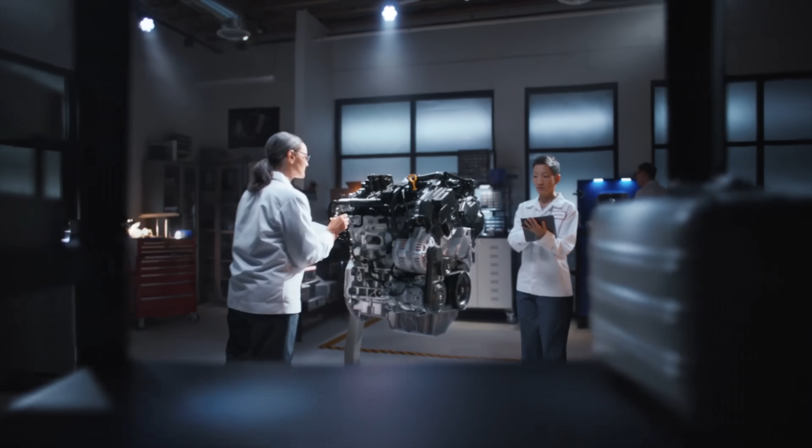It's codenamed J35Y8. And it's the new V6 for the 2023 Honda Pilot. Except that this time, Honda's dropped its iconic variable valve timing VTEC and added an additional camshaft for each bank. I'm talking about the first naturally aspirated dual overhead cam V6 in any Honda or Acura since the first generation NSX. Today we're looking at the new V6 engine, why Honda dropped VTEC, and how this engine will be significantly cheaper.

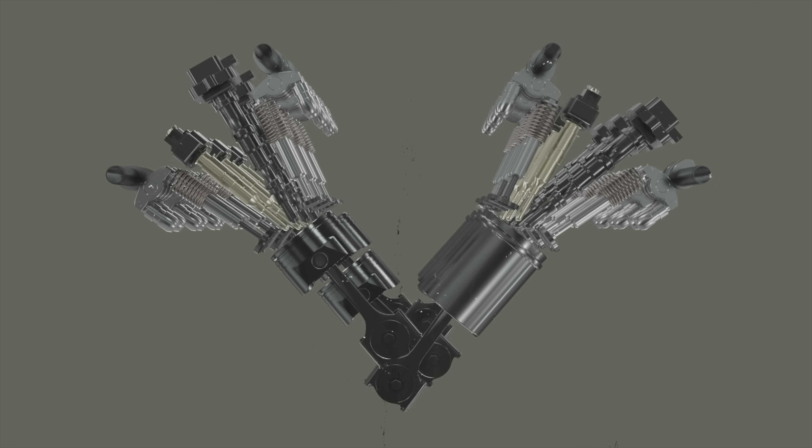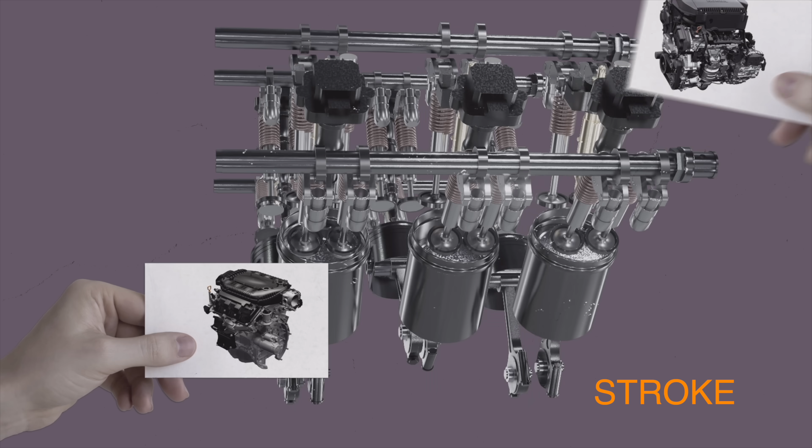Let's just dive right in. So the new V6 has the same bore, stroke, and compression ratio as the previous engine. In other words, the diameter of the cylinder is the same. Also, the phase of the engine cycle when the piston travels from top to bottom or vice versa is the same. And the ratio of the volume of the cylinder combustion chamber with its piston at the bottom position and top position is also the same.

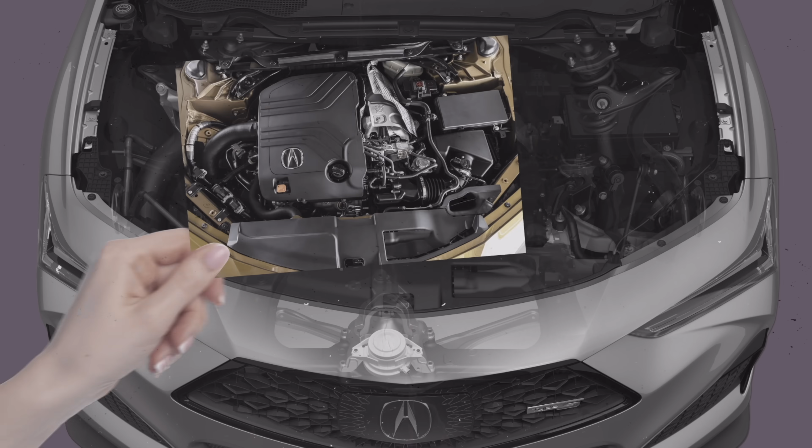But now, here's what's interesting. It's not what this new engine has, but what the engine has left behind. Instead of Honda's iconic VTEC system, it has an additional set of camshafts by way of the TLX Type S's double overhead cam heads. To appreciate the change, you have to understand what VTEC is in the first place. Most car enthusiasts have heard of VTEC, but to be honest, not many understand or appreciate how it works.

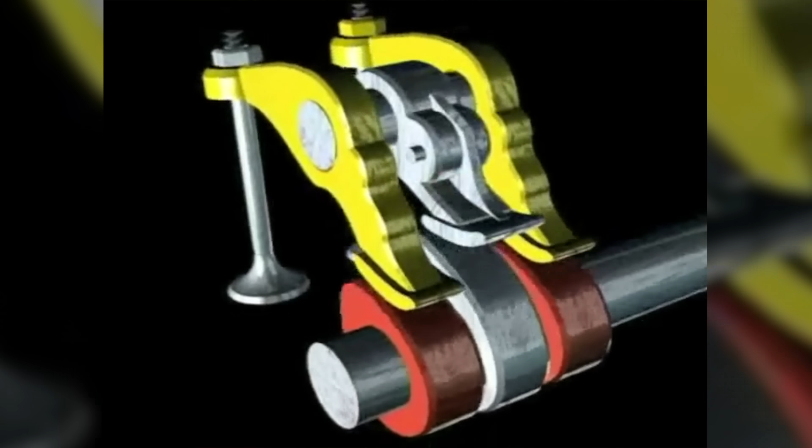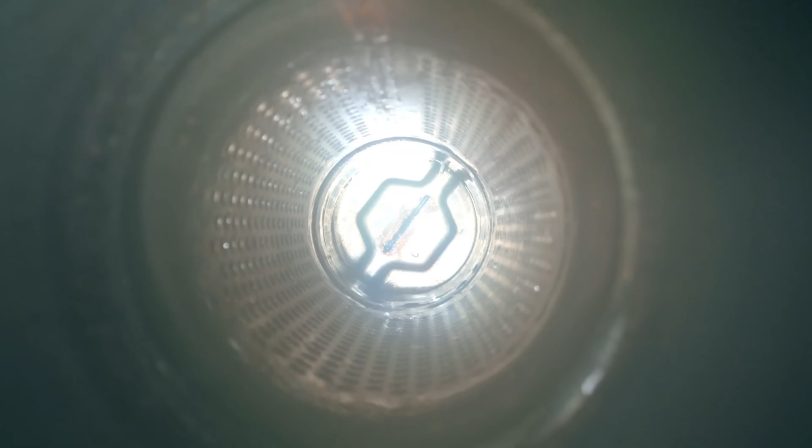VTEC is a type of variable valve timing system that Honda specifically developed. It's been used in Honda and Acura models since 1989, including the Acura NSX and Integra Type R, as well as the Honda S2000 and the Civic Type R. VTEC helps improve the efficiency of the engine and enables the engine to perform a lot better at higher RPMs. And the VTEC system also gets you low fuel consumption at lower RPM.

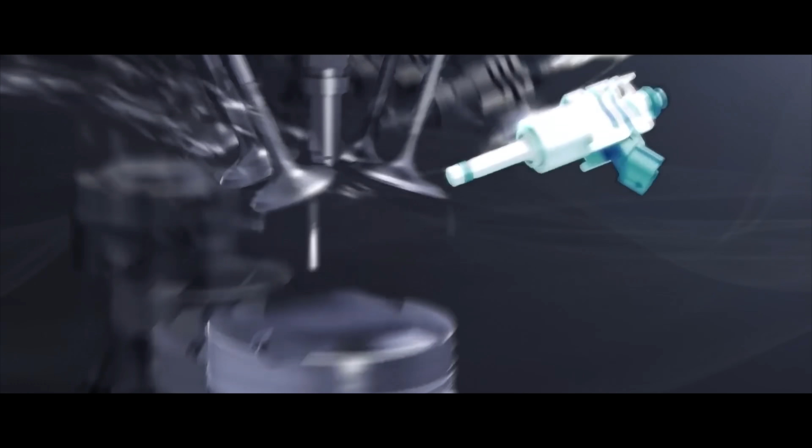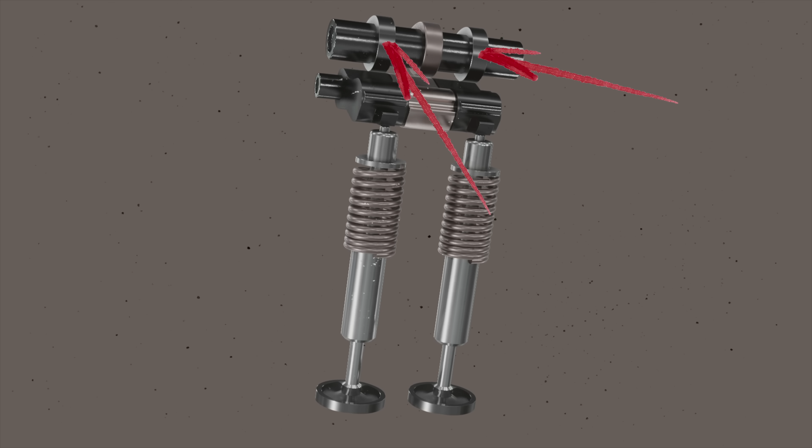But here's the thing, the Honda VTEC system is distinct and is nowhere near the average variable valve timing system you find in other cars. Most other systems increase the oil pressure to shift the timing of the camshaft and open the valves earlier. But the Honda VTEC engine has two different cam profiles on a single camshaft. First, we have two rocker arms with their own low-profile cams for each cylinder. The engine operates these when you're at low RPM and low load, and the rocker arms are unlocked.

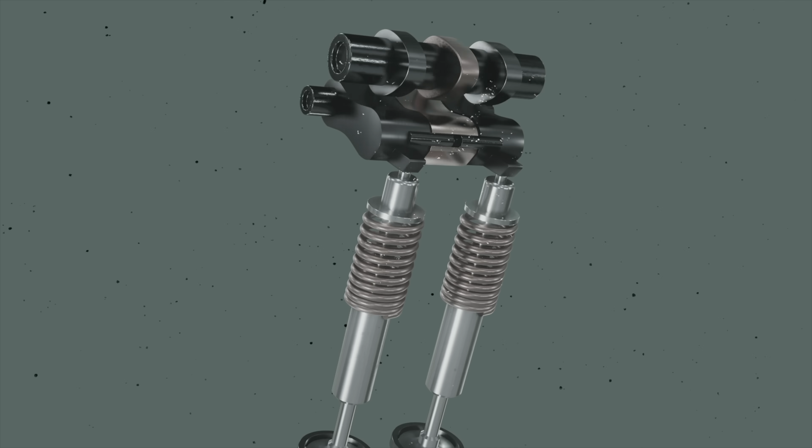And then there's also a central rocker arm with its own high-profile cam. It's unused at low RPMs. But at higher RPMs, the engine operates with a larger cam profile. As engine speed rises, the piston inside the rockers gets pressurized with oil, and that locks all three cams together to increase valve lift. In other words, the opening gets bigger and therefore enables more air to get into the engine. And actually, that's why you hear the iconic sound of the VTEC kicking in. It's that raw, loud, high-revving signature sound that gets your adrenaline running.

Funny enough, Honda first came up with the VTEC concept in the 1980s. It used it first for its CBR 400 motorcycle back in 1983. At that time, the concept was called Revolution Modulated Valve Control, or REV for short. It wouldn't be another 6 years until Honda would first add VTEC to one of its cars, the 1989 Honda Integra XSI, thereby creating an uproar in the car industry.

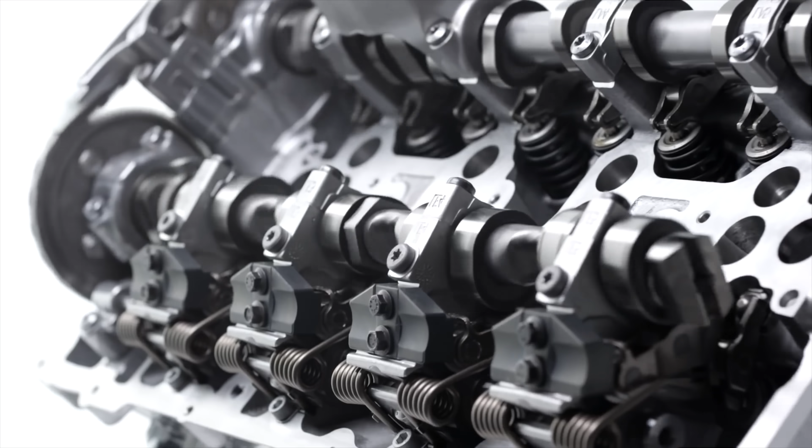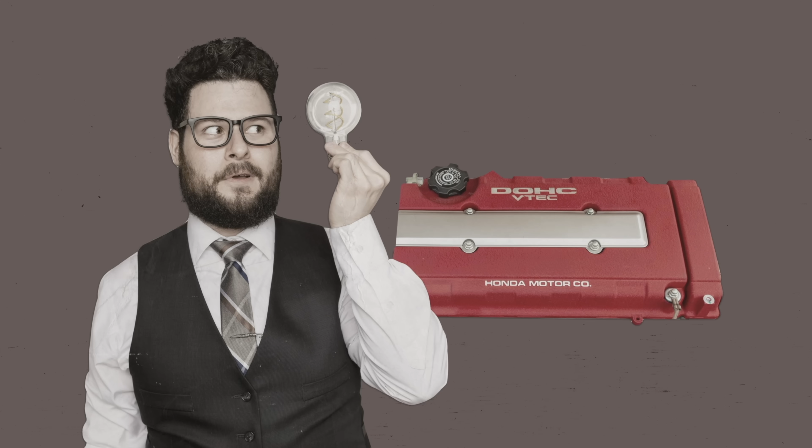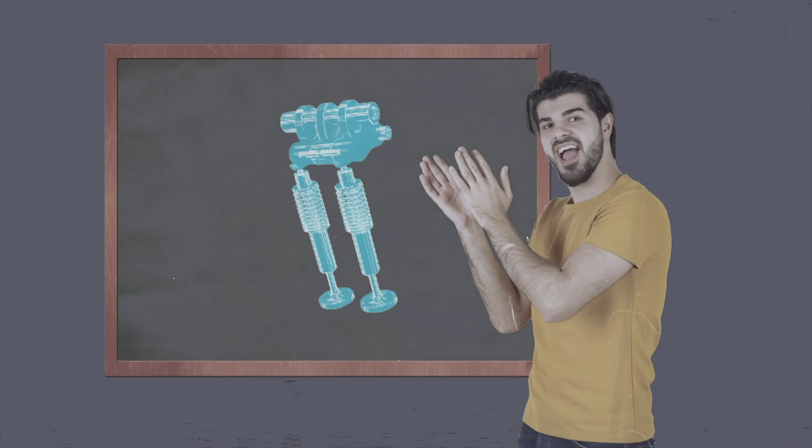Other car makers use variable valve timing, but they use different mechanisms and technologies. For example, BMW has Valvetronic. Toyota's technology is called VVTL-i. Honda wasn't the first to use variable valve timing, but it was a pioneer with its VTEC technology because it was the first car maker to combine lockable rocker arms and dual profile cams. It enabled Honda to combine two engine characteristics into one single engine and change it while it was still running. The concept and mechanism itself is so simple in hindsight, yet the output and result was remarkable.

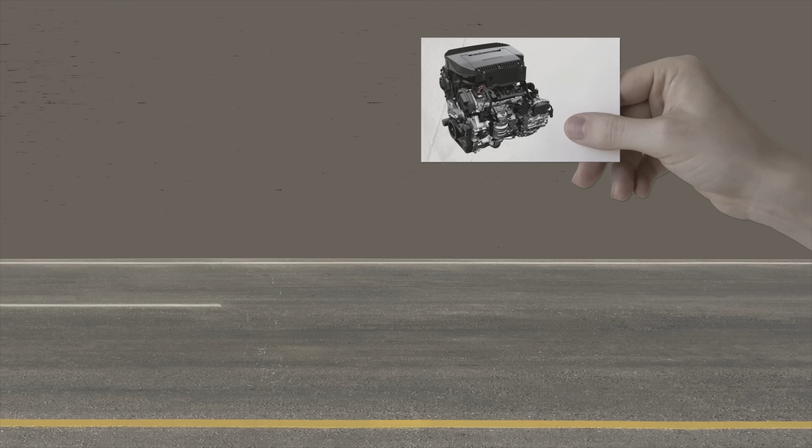Anyway, here's the thing about the Honda's new V6. It doesn't have Honda's signature VTEC system at all, and it comes as a surprise, since VTEC has been so iconic to Honda. It begs the most obvious question, if VTEC's so great, why is Honda ditching it on this engine? The new J35Y8 V6 engine boosts the horsepower up to 285 horses in total in the new Honda Pilot. That's just a nominal gain of 5 horsepower. And the car retains its current 262 pound-feet of torque.

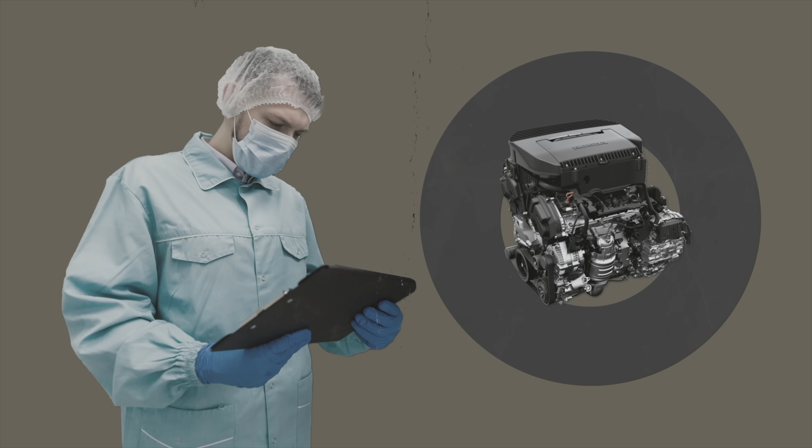But where the new engine really shines is when it comes to emissions. And that's why Honda ditched its VTEC. So you can blame it on emissions and regulations. It turns out the new engine is significantly cleaner than preceding ones. We're talking some 40 to 50% reduction in emissions with this new engine.

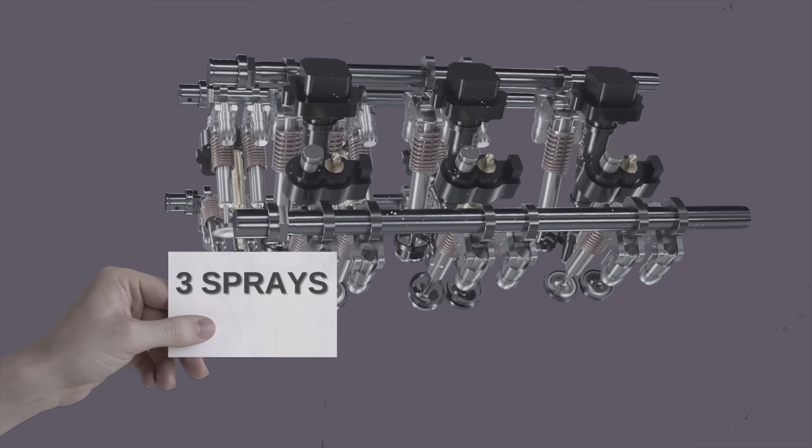Part of this efficiency improvement comes down to the engine's improved direct injection system. This improved system means more precise fuel delivery. On top of that, the system can also add up to 3 sprays per combustion cycle. And in the process, it uses smaller injector holes. And because there's no VTEC, the cam phasers can now continuously and precisely adjust intake and exhaust timing.

But, well, let's just say that there hasn't been too much excitement around the new engine. Actually, some Honda fans are pretty disappointed since it doesn't have the same performance gains that Honda owners were hoping for. But here's the thing. Its intent is to help Honda bridge the gap until it either electrifies its current lineup or develops new EVs. Honda's another late bloomer in the EV game. It's trying to catch up with this newer, cleaner V6 as a stopgap measure.

In the car world, Honda's been neck and neck with Toyota. These two Japanese car giants have been making waves for years. If you ask me, I think competition in the car industry is a good thing. It's what moves the car makers to constantly up their game, take risks, and innovate.

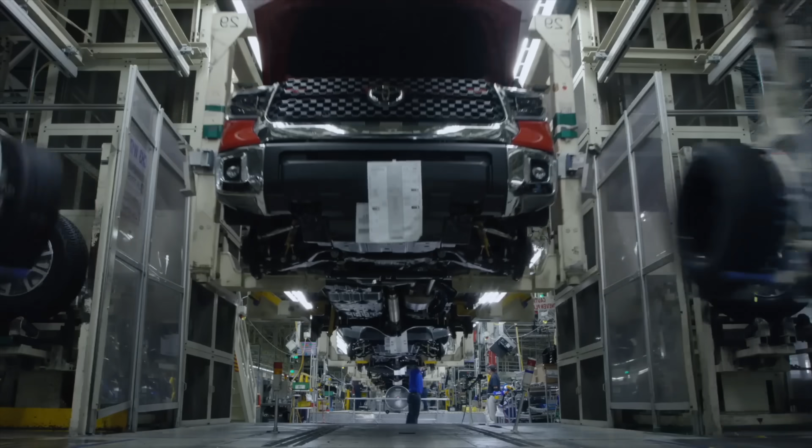And that's good for the end consumer, us. Honda and Toyota's rivalry has been described as one of the hottest rivalries in the industry. Each offers its own unique cars, some of which have become very iconic, with a cult-like following. Each company has influenced the entire car industry for decades.

But of course, the two companies aren't exactly alike. They may share similar interests, but there are key differences between the two. For example, if you look at Honda, you'll see that Honda puts its focus on speed and handling, in contrast to Toyota, which prioritizes dependability and reliability instead. Despite different strategies, each has put out some of the most legendary car engines to date.

Toyota doesn't have one specific famous engine. Rather, Toyota is generally known for everything from its tiny 3-cylinders to a V10 and even iconic inline 6s. Honda, on the other hand, is quintessentially famous for VTEC engines. VTEC's been around for 30 plus years. In fact, there are 5 particular VTEC engines that are notable in my book as the top Honda engines of all time. You could say these engines were VTEC milestones in their own right.

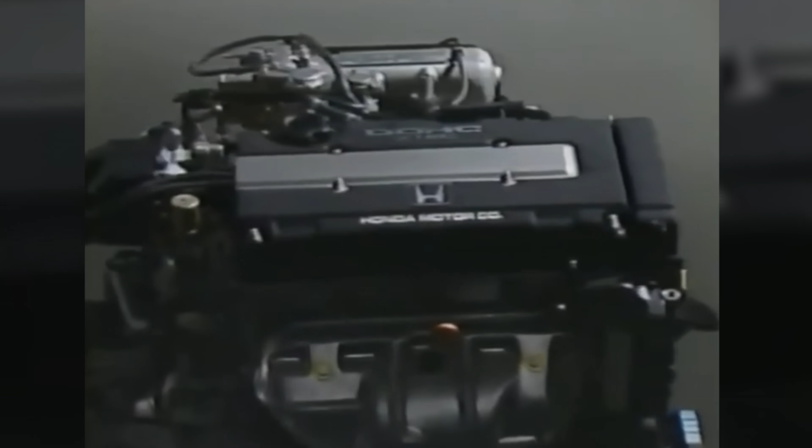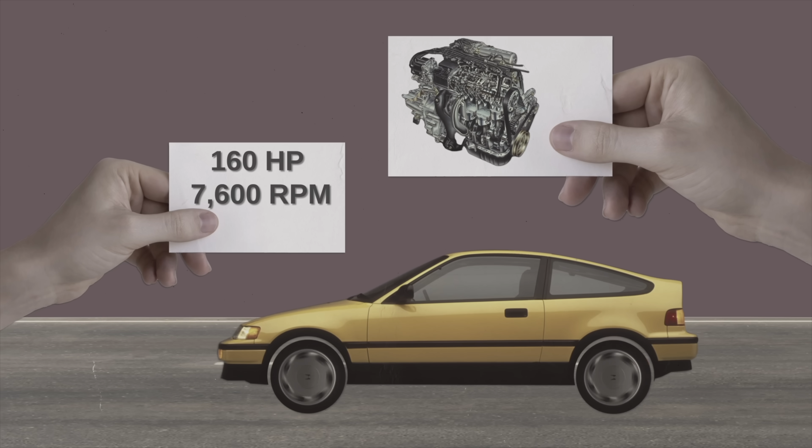It first started with the 1989 Honda Integra XSi. That was the first Honda to ever use the VTEC system, and it came with a B16 engine, which some Honda fans still call one of the greatest engines of all time. The first generation B16A engine was a 1.6-liter 4-cylinder double overhead cam VTEC engine. It output 160 horsepower at 7,600 RPM and 110 pound-feet of torque at 7,000 RPM.

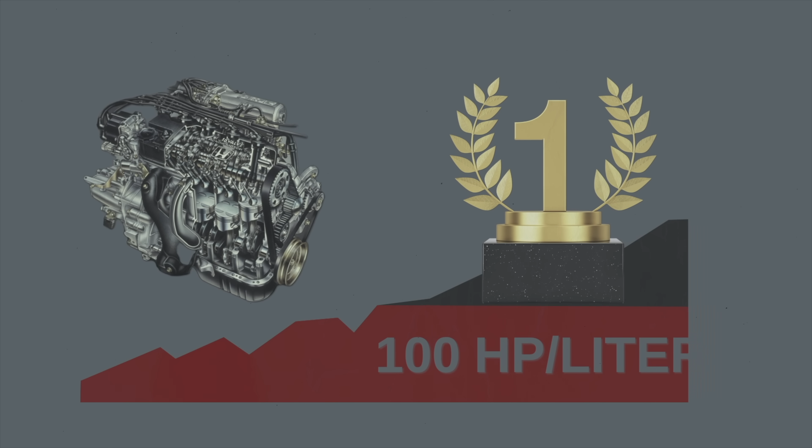It was also a milestone because it was the first ever mainstream naturally aspirated engine to hit the 100 horsepower per liter mark. I say mainstream because, if you want to get technical, the first production car to hit that mark was the Ferrari 250 GTO. But let's be real, Ferrari's not really mainstream.

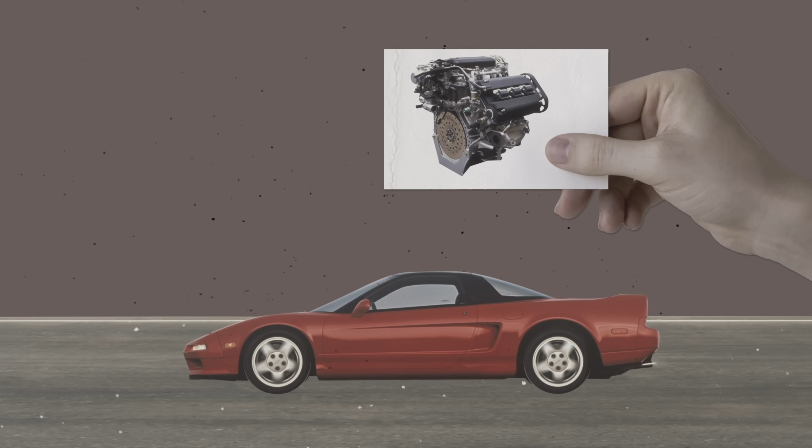A year later, we saw the C30A, and we saw it in the NSX, which is Honda's first attempt at a super sports car. That's when Honda started getting into Formula One. The first generation C30A was a 3-liter double overhead cam VTEC naturally aspirated V6 engine, and this engine churned out 270 horsepower at 7,300 RPM, 209 pound-feet of torque at 6,500 RPM.

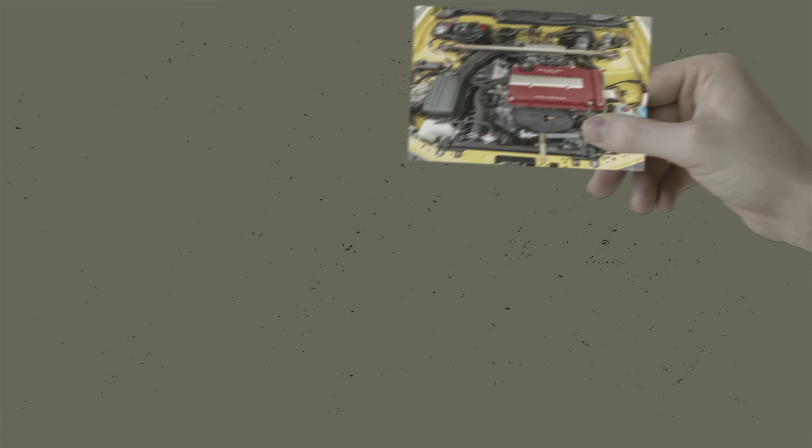Half a decade later, we then had the B18C in the 1995 Honda Integra Type R DC2. I'm talking about a 1.8-liter 4-cylinder double overhead cam VTEC engine. The engine pumped out 197 horsepower at 8,000 RPM. Max torque was 131 pound-feet at 7,200 RPM. In fact, it was hailed as the ultimate Honda VTEC. Others called it the greatest front-wheel drive performance car ever, and even the best handling front-wheel drive car ever, and it was for its time.

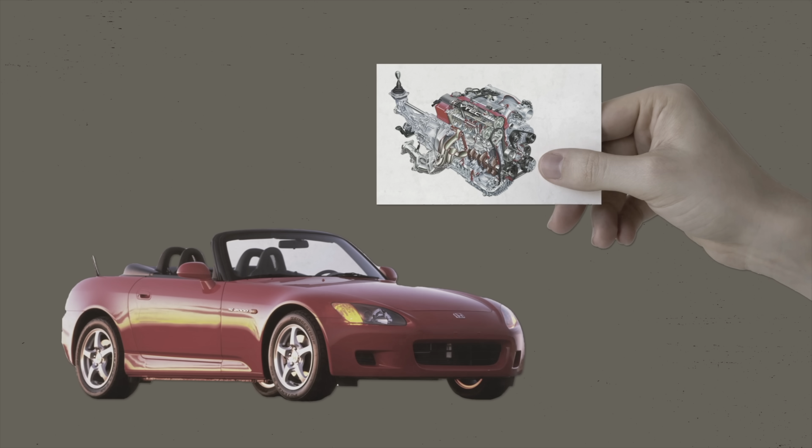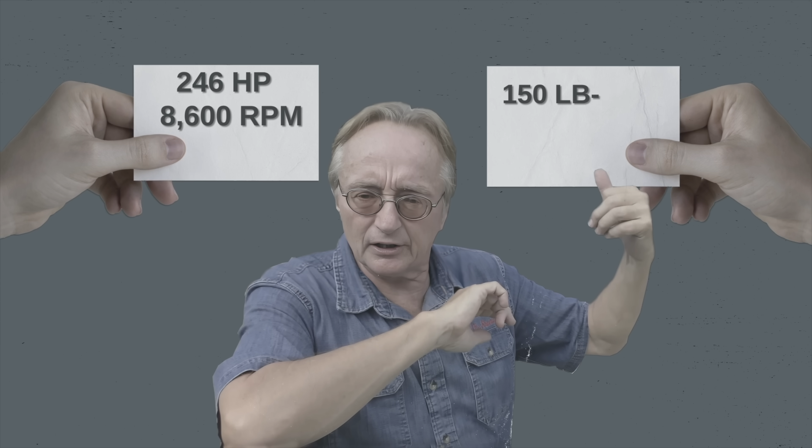Another notable VTEC was the F20C. The first car to be blessed with that engine was the 1999 Honda S2000 Roadster. It was a front-engine, rear-wheel drive sports car with an open top. We're talking a 2-liter 4-cylinder engine that generated 246 horsepower at 8,600 RPM and a maximum torque of 150 pound-feet at 7,500 RPM.

The F20C won the record for the highest specific output of a naturally aspirated engine in a production car. And in fact, it held that record for a solid 11 years. It wasn't until 2010 when Ferrari beat the record with the 458. And even then, it only trumped the record by a mere 1 horsepower per liter. Ha!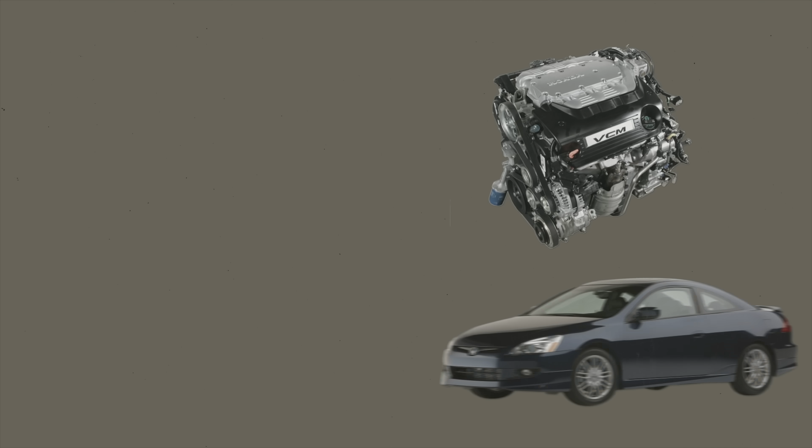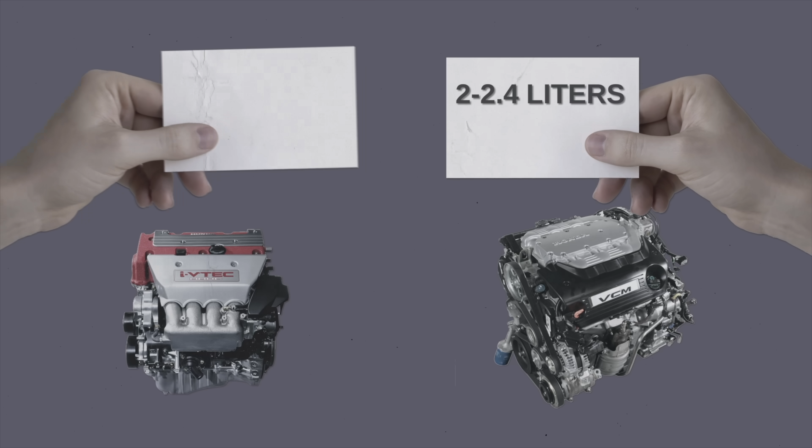And of course, we had the famous K-Series engine. It was the successor to Honda's iconic B-Series engine as a flagship 4-cylinder double overhead cam engine. It was larger than the B-Series since its engine displacement ranged from 2 to 2.4 liters, compared to the B-Series engine, which ranged from 1.6 to 2 liters. We saw the K-Series engine in Honda from the early 2000s till the mid-2010s. And actually, it's still even used in current Civic Type Rs.

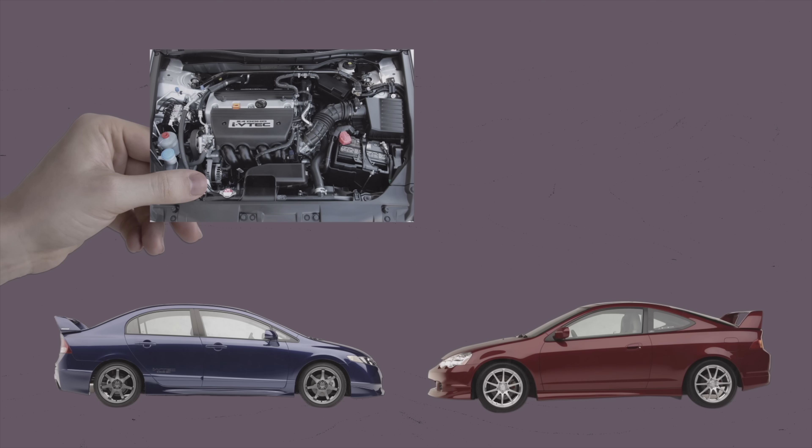In particular, the K20A is especially noteworthy. It's a high-performance variant that you see in the Type R models, like the DC5 Integra Type R and the FD2 Civic Type R. I'm talking 222 horsepower at 8,000 RPM and peak torque of 159 pound-feet at 6,100 RPM.

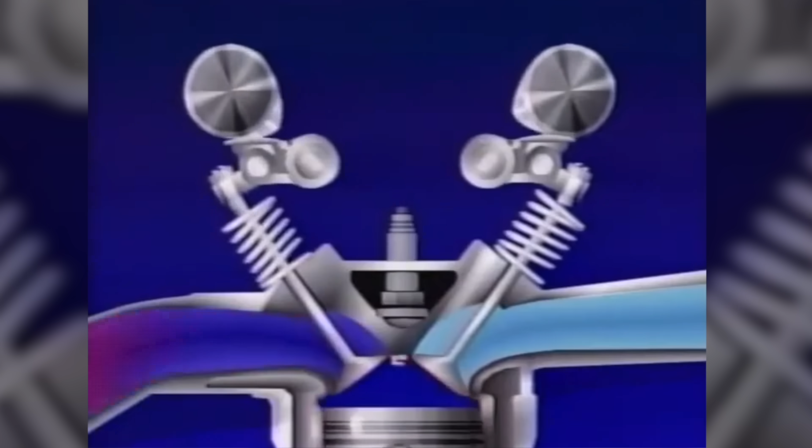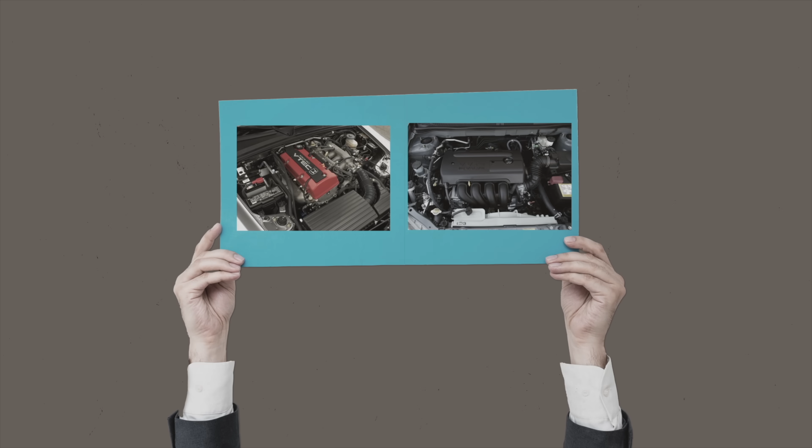But let's talk a bit about the pros and cons of a VTEC engine. Even though Honda's new engine doesn't have VTEC, previous models do. So if you're in the market for a Honda, for example, it'll help to know the pros and cons of VTEC. I'd say that the biggest advantage to VTEC is, well, basically, VTEC is the replacement for displacement. VTEC gives you a ton of power at very high RPM. Contrast that with an average ordinary engine with standard variable valve timing, and it's not possible.

So if you're looking to get power and you want to save a few bucks, VTEC is probably one of your best bets. And even if your vehicle outputs, let's say, 110 horsepower, it'll feel a lot faster than a car that generates more power. That's because you'll have to shift later and beat a car with more power in a straight line. They say the sky's the limit when you're running a VTEC. VTEC also delivers significant fuel economy at lower RPMs, especially if it's a single overhead cam VTEC. Reason is, it has one camshaft.

But bear in mind, VTEC has a set of disadvantages too. I'd say one of the biggest is that turbo engines are no longer VTECs. I mean, they might be called VTEC, but that's not the case. That's because the VTEC is moved to the exhaust camshaft instead of the intake. So no more performance or the sounds of the VTEC kicking in.